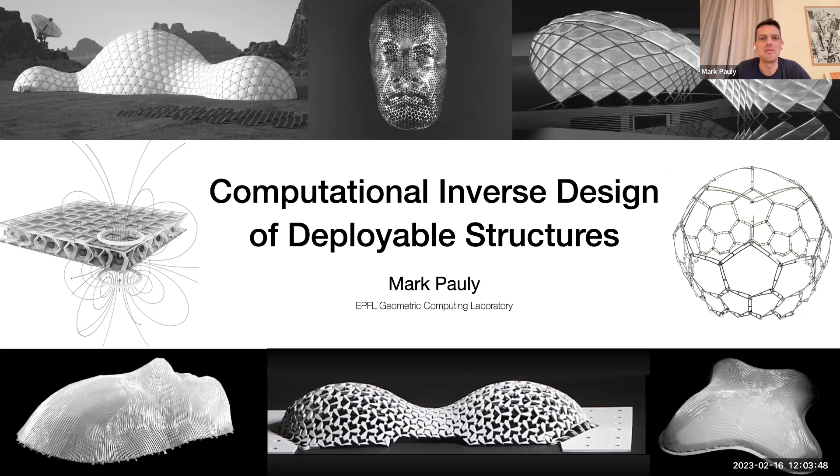Before getting started, I wanted to give you a brief overview of our playing fields. My background is in computer science, specifically computer graphics, and this is our core domain. But I'm very interested in fabrication, especially modern digital fabrication technology and what it enables us to do. We are interested in applications, specifically in the space of architecture, art, and design, also to keep us grounded and validate our computational work in the real world, so to speak.

And as Evgeny was saying, I'm personally very inspired by art and nature. Geometry is my thing, and I walk through the world and see beautiful geometry in nature, in artwork. A number of the projects that I'm going to show you today have been triggered by either an art piece or an observation in nature that made me curious, to understand whether this is something that we can understand and utilize in some way, and maybe do some computation with.

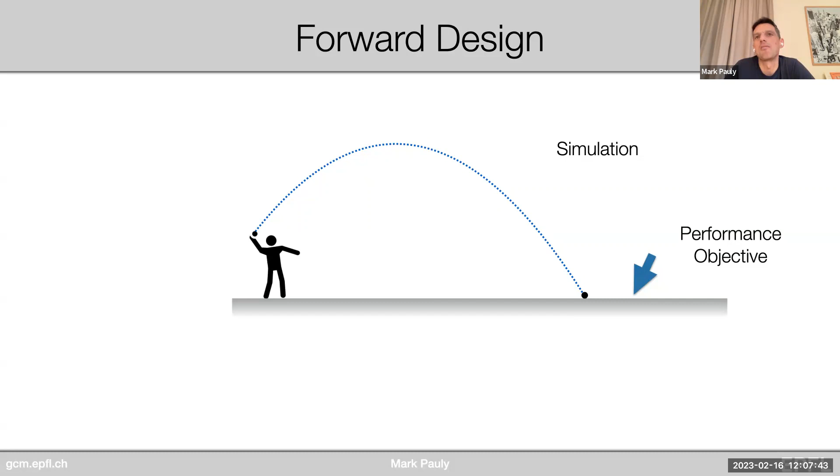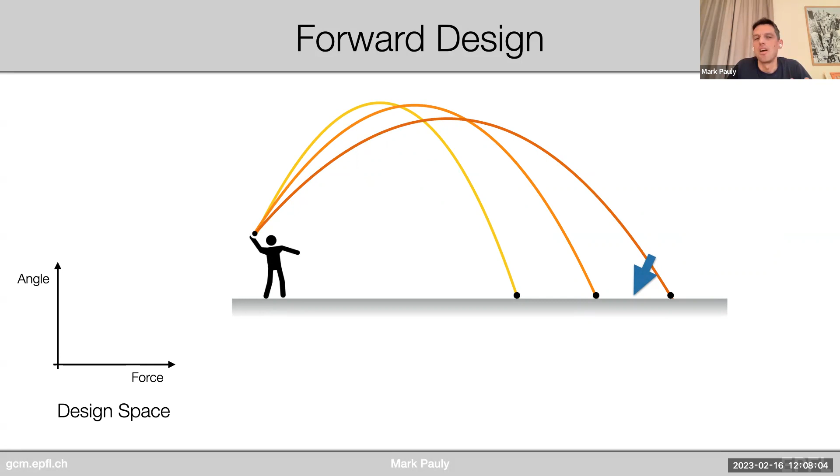So here we have a system where I can define a very precise goal, a sort of performance objective, if you will. I want to hit a certain point on this plane. And of course, I have parameters that I can manipulate, and this is what I call my design space. For example, I can add more force to my throw, and that will get me maybe closer or further away from my objective. I could also change the angle. So these, in this very simplified example, are the 2 parameters that I can vary to change my design.

And if I pick a specific point in this design space, in this very simple 2-dimensional space, then I can run a forward simulation, check whether I hit my target, and in that way evaluate my design. Now, this simulation can be quite complicated. This can involve complex PDEs, for example, things that are not so trivial to do. And in the end, I have to evaluate how good my design is. In this trivial example, I have a very simple objective: I just want to know how far I am from the target.

But in general, in design, you have many more and sometimes conflicting objectives. So in this performance space that you really care about, where you would evaluate your design, complexity can already be quite different. So you can design by just choosing parameters, running your simulation, and evaluating the design. That's what I would call forward design, where you directly manipulate the parameters at your disposal. But our goal will be to do inverse design.

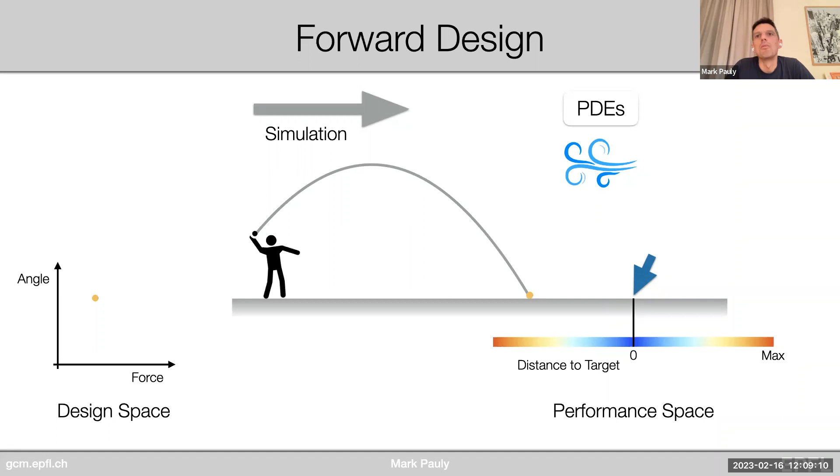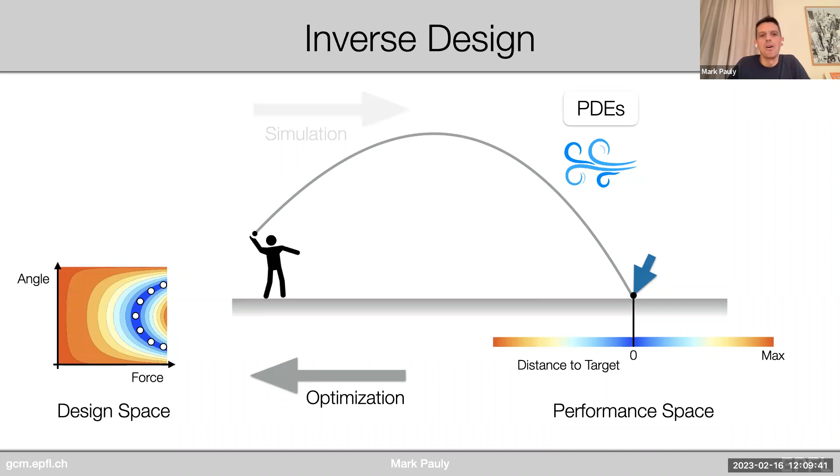And that means that I specify my design target, and I try to make this in a way that it can be quantified, or at least the aspects of my design that can be quantified. And now I want to invert this process and find the parameters in my design space that actually meet my objective, or if the objectives are conflicting, find some balance and trade-off. And this can give me various kinds of solutions that I can then explore or evaluate further. Now, this type of abstraction is actually quite helpful to think about the kinds of problems that I want to talk about.

So we have a design space. This is the space in which we can manipulate parameters that are accessible and exposed to us, a set of continuous or discrete variables that I can change. Then I have some sort of process, a forward simulation, and I'll show you this specifically in the context of our deployable structures, that allows me to evaluate this design and measure its performance. And performance could be shape, structural stability, visual aesthetics, many different things. And our goal is to say, as a designer, it's much nicer and more intuitive to specify your performance criteria, to say what you want from the design.

What is a good design? When is a design according to your needs? And then solve that inverse problem to find the design parameters. And these things are generally very hard, right?

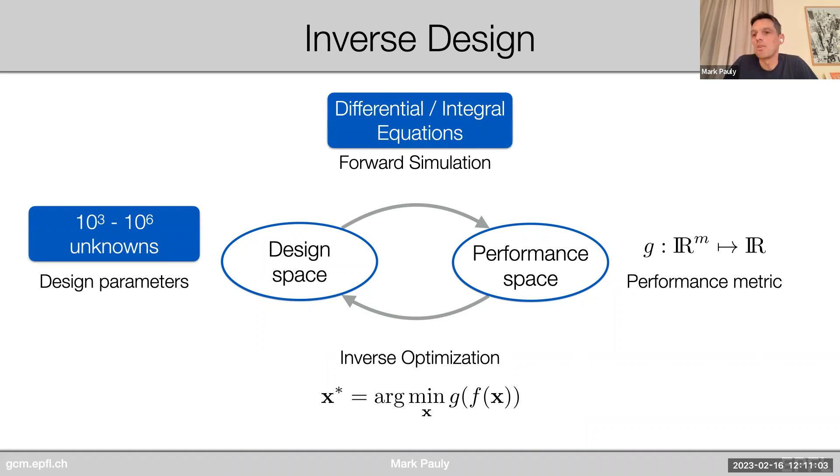Why is this difficult? In this toy example I showed you, I had 2 parameters. In general, we are often dealing with thousands or potentially millions of unknowns, and forward design in this space becomes completely infeasible. You cannot choose yourself 50,000 numbers to specify a design. It's just not practical.

The forward simulation in itself can be very complex. Typically, we have to solve differential or integral equations in high-dimensional spaces, so this in itself is already difficult. The performance metric can be complex to evaluate. Usually you have global dependencies, meaning that changes in a few of your design variables can lead to drastic changes in your outcome.

So this is in general intractable. If you specify most relevant, reasonable problems, you cannot really solve this in any meaningful way. So we have to really go in, and the two main ingredients in our work in some sense are to look at efficient ways to solve this. This is really, I would say, a numerical or computer science challenge.

But then the key thing that I would want to stress today is really that it's the geometry that matters, in the systems at least that we study. And I want to show you, or at least give you a glimpse of the kind of tools that we use to approach these difficult problems.

So specifically today, I want to talk about deployable structures. These are things that have fascinated me for a long time. So what are deployable structures? Basically things that can transform from one state to another, basically changing their shape.

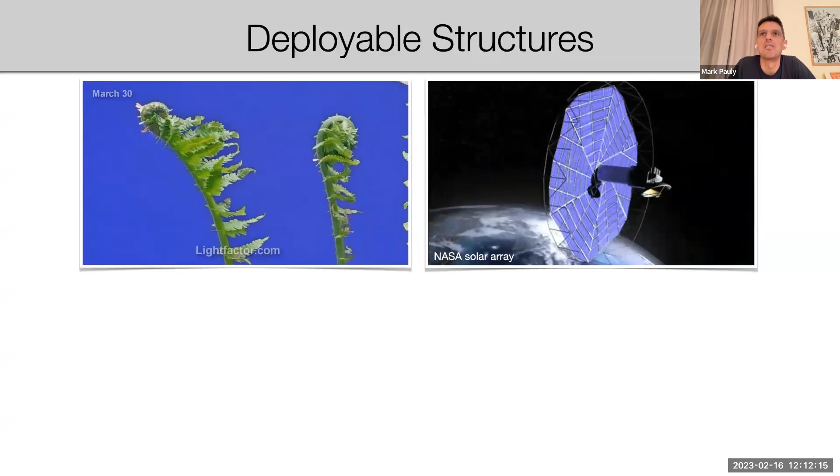And they appear in nature, they appear in industrial applications, they can appear in design and engineering, or even in architecture. So they can happen at many different scales with many different material systems. But the thing that is common to them is basically that there's a shape transformation happening, and that shape transformation has a function or meaning or use, right? So I want to walk you through a number of projects that we did in this space, starting off with a work on auxetics.

This is actually one of those examples that got triggered by design. I stumbled into a design store and I saw this kind of object, which is basically just a brass or copper plate with a specific pattern of incisions. And I was very intrigued.

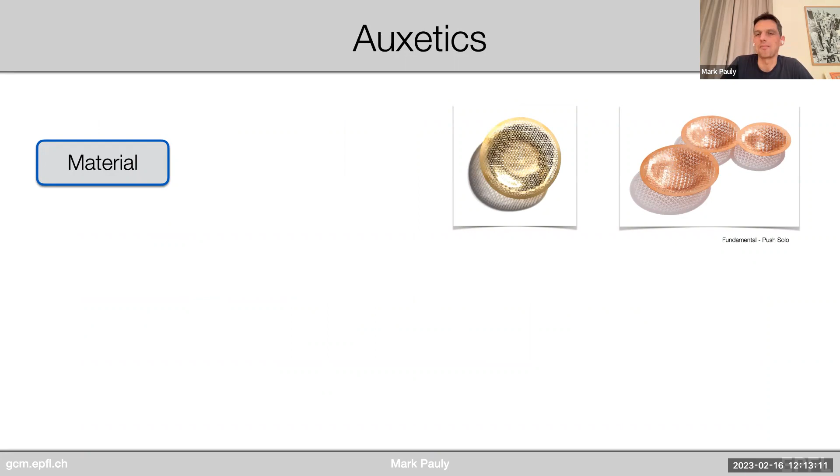Normally such a metal plate would just be bendable in one direction, sort of a developable surface. But if you add incisions, you can actually deform this material into double curved shapes. So we were curious about this, and we made our own copy.

Auxetic basically means that this is a material with negative Poisson's ratio. If you stretch it in one direction, it also expands in the transversal direction. And this actually allows this normally single curvature type of material to assume a double curved shape. So we can wrap this around a sphere, which we could not do with this plastic sheet if it was not having these incisions.

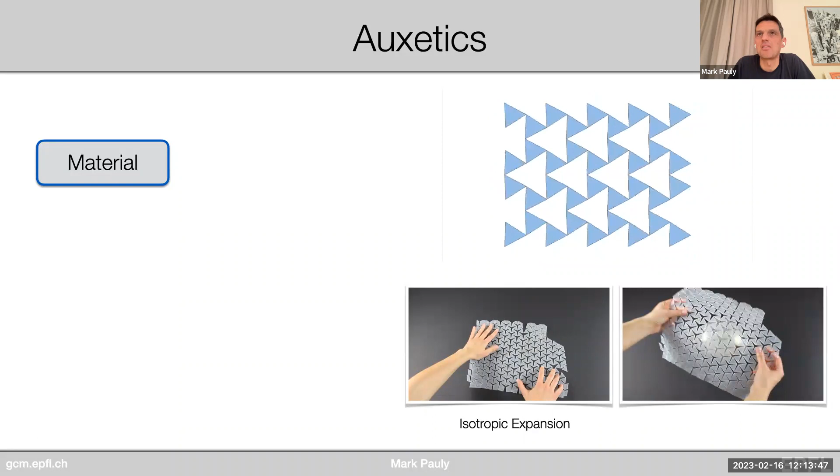So the first thing that we do is abstract this a little bit. Here, this type of specific auxetic material can be represented by a triangular linkage with a specific pattern that you see here. And you can see this isotropic expansion that is going on.

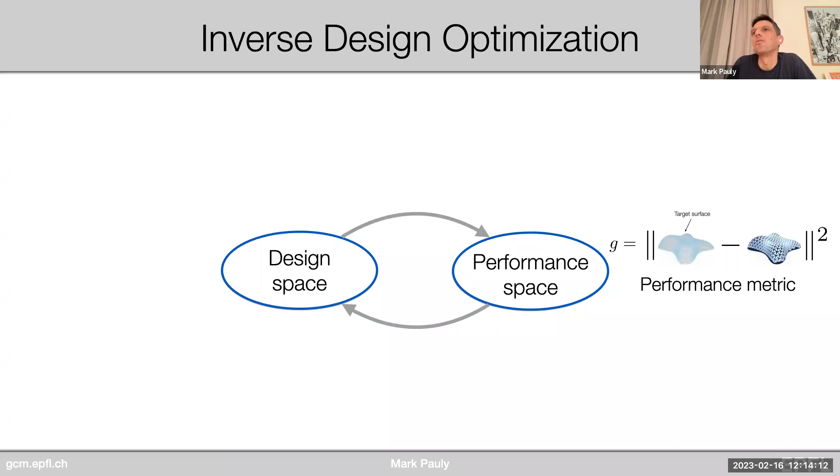And if I go back to our inverse design optimization, then our design target is really that we want to deform this object, or deploy this object, into a specific target shape. And our metric in this sense becomes: how close does our material, that is of course constrained, as we will see, achieve that specific target?

Our design space itself is the 2D sheet material, right? We want to cut out a piece of this material and figure out how it would deploy. So our forward simulation is that deployment, that deformation from the flat planar fabrication state to the 3D surface. So our input is actually the target surface, and our output is the 2D flat fabricated object.

And this is a theme that we will see throughout, in the sense that we have a number of systems where we deploy from one state that is easy to fabricate into a 3D state that would be very difficult to fabricate directly, but that has interesting functions or aesthetics.

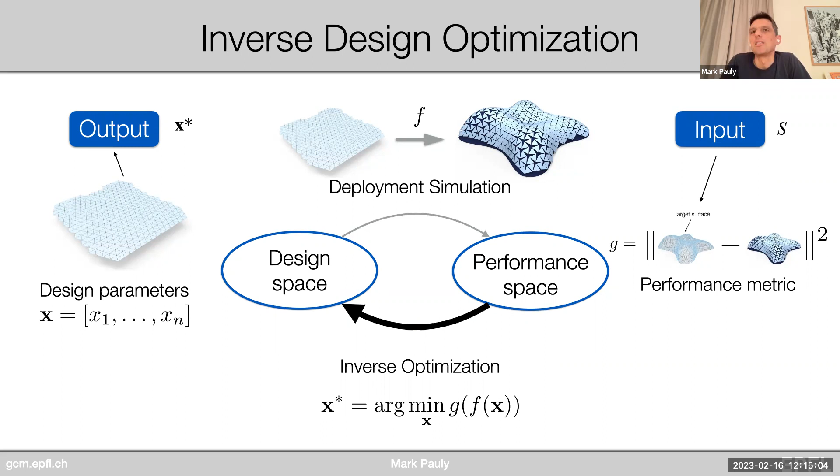So our goal is to solve this inverse problem. Here you see in this formulation that we're looking for the design parameters that minimize, in this case, this performance metric, the distance to the target surface. But you see it's sort of a nested loop, right? We have the forward simulation in the inner argument of that function.

So how do you solve a problem like this? This is a minimization problem. Typically what you do with functions like this is set the gradient to 0. That's a necessary condition. If you're at a minimum of this function, the gradient is 0.

So you can do gradient descent, a very basic method, which in our case would be: we have a target surface, let's say this scan of Max Planck, or a statue of Max Planck to be precise. And you have an initial guess of what you want to start with, maybe a sheet of material. Now you basically deform this sheet so that it matches the target.

And you do gradient descent on this. Very basic, very easy. Gradient descent, of course, starts somewhere, in this case with this initial guess, and moves down the energy landscape until it hits a local minimum.

The problem is, this doesn't work at all. If you run gradient descent on this kind of problem, the sheet tries to wrap around this object and it's just terrible. And this is not very surprising, because this kind of simulation is a very nonlinear, very non-convex function, and you cannot hope to start at a random point and get to a good local minimum.

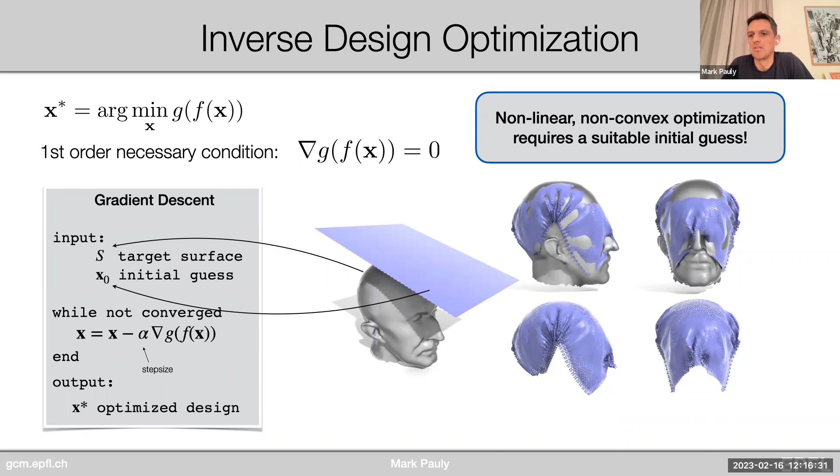So this is not a question of your numerical solver. It's really just fundamental to the problem. And what do we do? Well, geometry comes to the rescue. This is sort of a big theme we have in our research in general: we figure out ways to make this work by exploiting geometric insights we have about the problem.

I'm going to do a quick detour. I'm not completely sure what everybody's background is, but I guess everybody's familiar with the concept of curvature, at least in some sense. What does it mean for a surface to be curved?

Basically, we're looking at two types of curvature. Curvature in its first instance is defined for a curve, how much it deviates from a straight line. And if you generalize this idea to a surface, you end up with two types of curvatures that we often call the principal curvatures. Their product is the Gauss curvature.

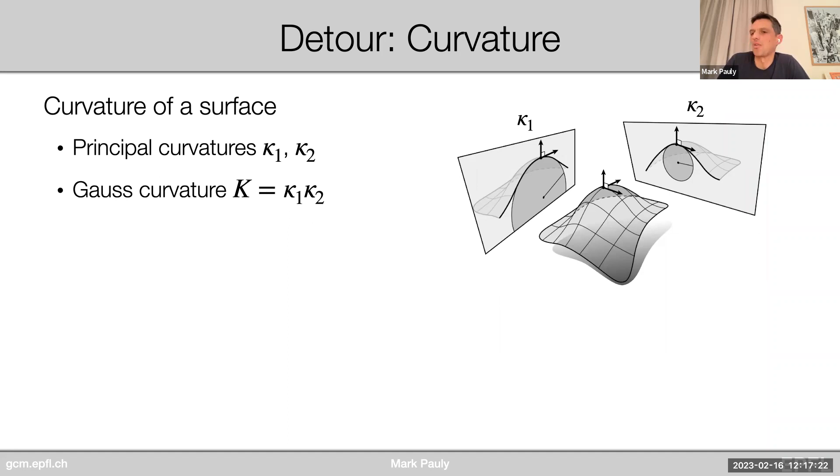When we talk about the curvature of a surface, typically we mean the Gauss curvature. There's other curvatures, like mean curvature, but here I will mostly talk about Gauss curvature, which is the product of the two. And that allows you to classify, for example, surfaces.

If I take a sheet of paper and bend it, the Gauss curvature is 0, and I can make so-called developable surfaces: cylinders, cones, things like that. Negatively curved surfaces are saddle points, and positively curved surfaces are sort of spherical or elliptical points.

Now Gauss showed something that he himself called the remarkable theorem. And if Gauss says it's remarkable, you can be sure it truly is remarkable. It's something that is not obvious at all and has very deep implications.

Basically what he figured out is that the Gauss curvature is an intrinsic quantity, meaning it's something you can determine by only measuring distances on the surface. So if you have a way to measure distances on the surface, you can actually figure out what the curvature is. And this is not at all intuitive, because curvature in principle is a second order quantity, and length is a first order quantity. So why is this possible?

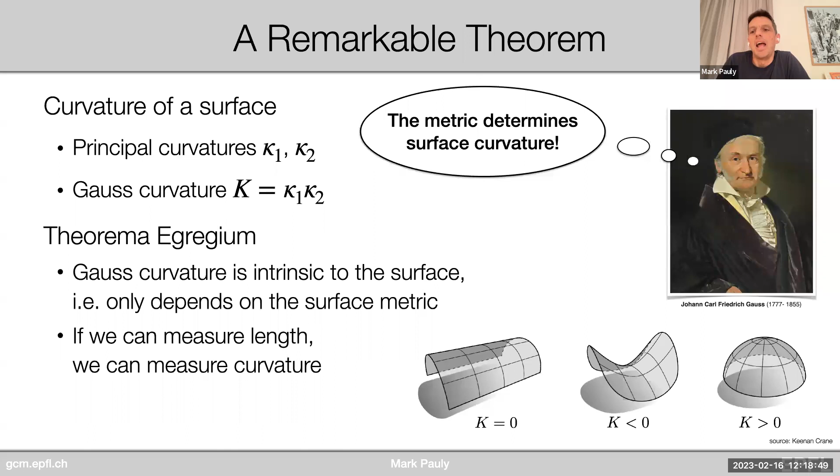I'm not going to go into the proof or more of the details, but I'm going to talk about the consequences of this. Basically, what this means is that the metric, meaning the ability to measure length on the surface, determines the curvature. And this is a principle we can now turn around: we can say, if we can change length, we can change surface curvature.

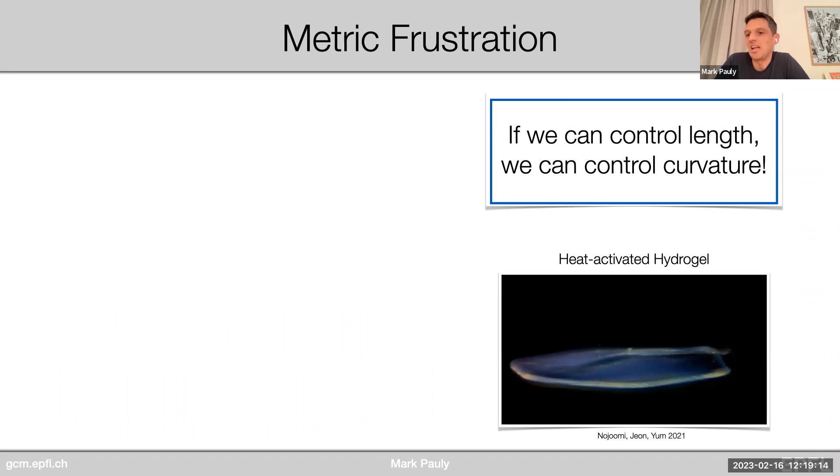So this is actually a principle that has been used a lot, in many different instances. Here's an example: a heat-activated hydrogel. As you heat this up, this surface will expand in the plane at different rates. So we're changing length across the surface. And if you do that, the surface buckles out of plane.

In order to accommodate that change in length, it has to assume curvature. There are many other examples like this, so we can control the shape of a flat piece by changing its length. This also happens in nature a lot. If leaves grow at different rates in different parts, the only way to accommodate that inconsistency is to buckle into a 3D shape. And this is exactly the principle we're going to exploit for our auxetics.

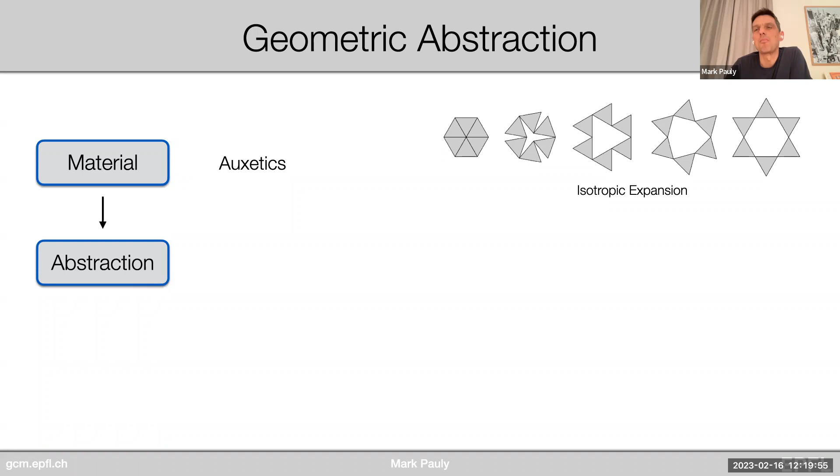We've seen from this regular linkage pattern that we have isotropic expansion, and this is something we can abstract into a so-called conformal map. It's a very deep mathematical theme, but relatively easy to explain. It says that if the material expands isotropically, at the same rate in all directions, then locally the surface scales uniformly. So we preserve angles.

If you look at this example, the regular grid in the plane gets transformed. The squares remain squares, but they change in size. You can of course also do this from a 2D surface onto a 3D shape, so this is a mapping from the plane into 3D that preserves angles but changes distances. People in computer graphics have developed ways to compute these conformal maps for arbitrary surfaces, so given some 3D shape, we have a way to compute this type of flattening in the plane.

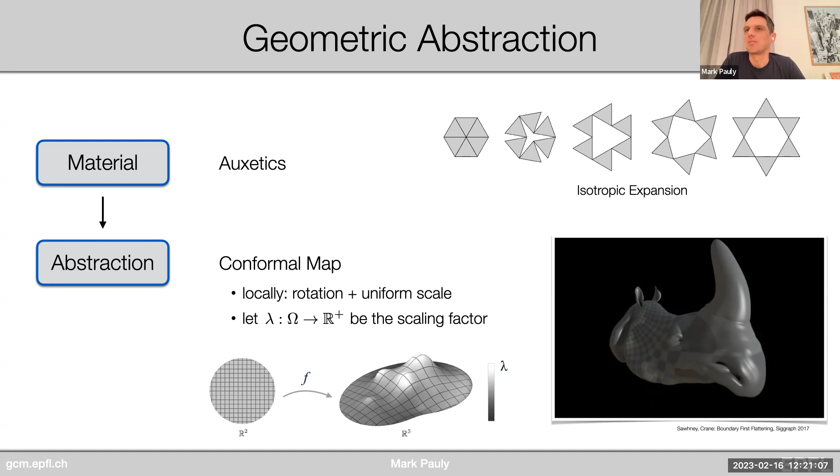Now there's something very interesting happening. A conformal map is a special kind of mapping from 2D to 3D, one that allows us to very explicitly write down the curvature as a function of that local length scale. This is a famous formula in differential geometry. The specifics aren't so important, but it says that the curvature is related to the change in length, this uniform scaling factor. The Laplace operator in there says it's actually the variation of scaling that matters.

So this allows us to control curvature, and consequently the shape of our structure, by varying the local expansion in our map. If I take a regular triangulation like before, or take this auxetic and open it uniformly, there's actually no curvature, because the scale factor is the same everywhere. And if I take the Laplacian of a constant, it's going to be zero, so Gaussian curvature is zero. So we can only achieve curvature if we let the opening vary across the surface.

Here's an example: if we want to map this onto a sphere, then these openings are not uniform. They're not the same everywhere, but they vary, and this variation is precisely encoded in that shape.

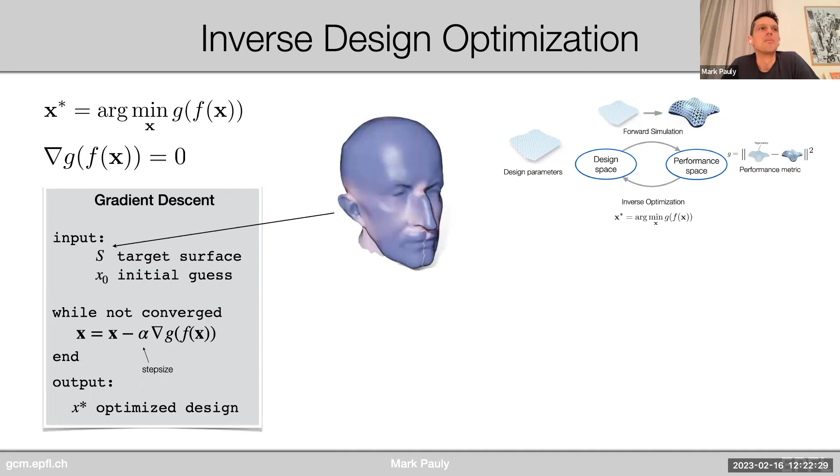So what that means for us is that if we want to do an inverse design pipeline, going back to our gradient descent method, we're not starting with some random surface, but we're starting with a conformal map of our target surface. We apply this conformal mapping paradigm to get an initial guess for our optimization. In practice we do something more advanced, but if we could do gradient descent, we now actually get a solution that works, because we understand that to get to this shape, we need something close to a conformal map. So the conformal map gives us the initialization we need.

If you compare this with the naive solution, where you start with no information or a random guess, the result is drastically different. Now we have a complete pipeline: take an input shape, compute its conformal map, run our optimization, cut this out of a piece of copper, and deform it into the target shape. It will fit—you know exactly how much you need to open each of those hexagons to get to the shape. So you get the complete solution.

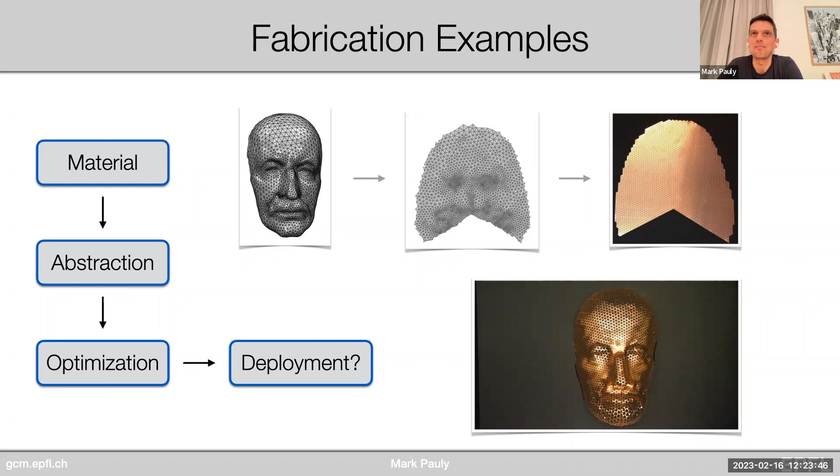Now, I told you about deployable structures. How do we deploy this? Actually, this isn't deployed at all—it's just manually deformed by hand onto a mold surface. To make this actually deployable, we have to take it a step further. So what we're doing here is really just creating a fixed type of material.

All of these incisions are the same. The material doesn't know what shape it wants to go into. We have to give it that information by, for example, using a mold surface. So we need this external surface to actually tell the surface what it wants to deform into. And that makes deployment complicated, because you almost have to first make the surface to be able to deploy it.

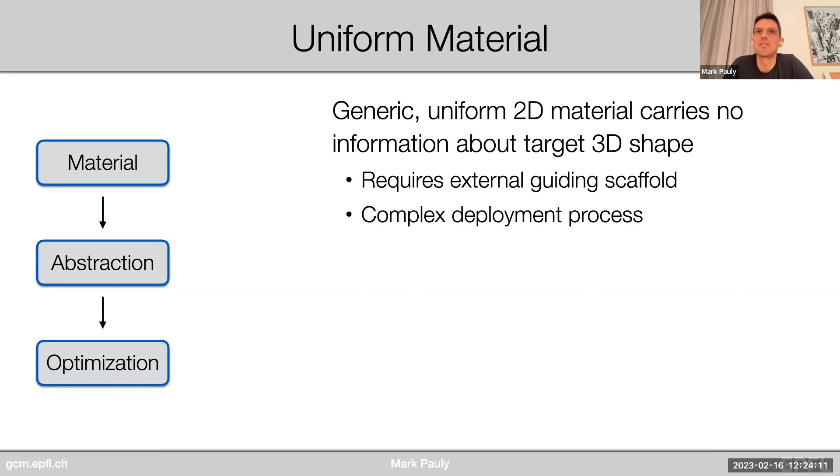But what we can do, and it requires actually a very little change, is to encode the target surface, so the surface that our structure is supposed to deform into, into that 2D material. That's what we call sort of programmed material. And it's a simple trick.

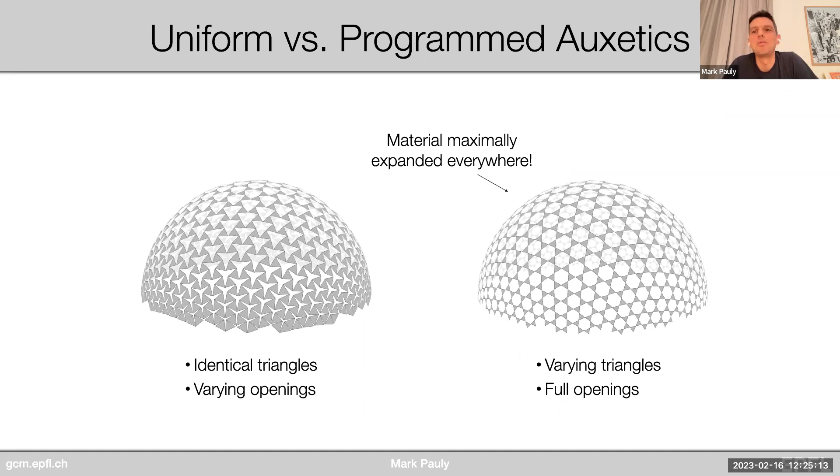We can achieve the same effect by actually changing the size of the triangles, but keeping the openings fully expanded. Okay, so this actually gives us sort of the same structure. It looks a bit different, but the underlying mechanism is more or less the same. What that means, though, is now that our material in its 2D state is not uniform anymore, right? We now have to create this specific material for this specific shape.

But what it allows us to do is, so here you see this sort of variation. Some of these openings are already partially open, where we have less expansion, and where we have more expansion, we have bigger triangles that are more closed up. But now we have actually the target shape encoded. If we come up with a way to stretch the surface out as much as it can, then it will automatically go into the shape that we've programmed into it.

And we explored sort of two types of actuation. One is inflation, and the other one is just using gravity. And I'll show you how that looks like.

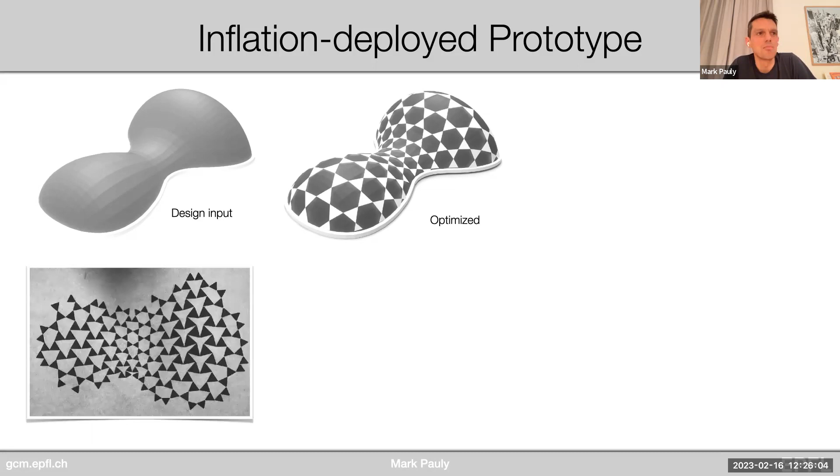So here we have a target input surface, and the optimized result is shown on the right. We can now flatten this surface, of course. We cut it out of a piece of cardboard in this case. We build a little frame so we can inflate this, and we add a balloon, right? So this balloon you just inflate, it's a silicon rubber thing. It would go to whatever shape it wants to go, certainly not to the shape that we specified as input.

But if we now add this material on top, then this balloon will now inflate exactly to the shape that we designed, because this material will stop moving once it's fully expanded. It cannot move anymore, right? This is the principle that we exploited here. So we've programmed this shape into that 2D material.

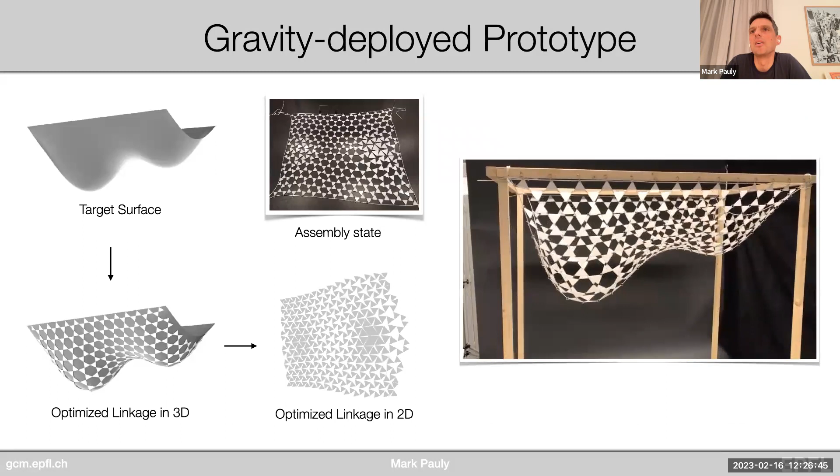And for some more restricted types of surfaces, you can even do this by just letting a structure hang, right? This is now a doubly curved structure with positive and negative curvature that just deploys automatically by gravity, because these tiles want to expand as much as they can.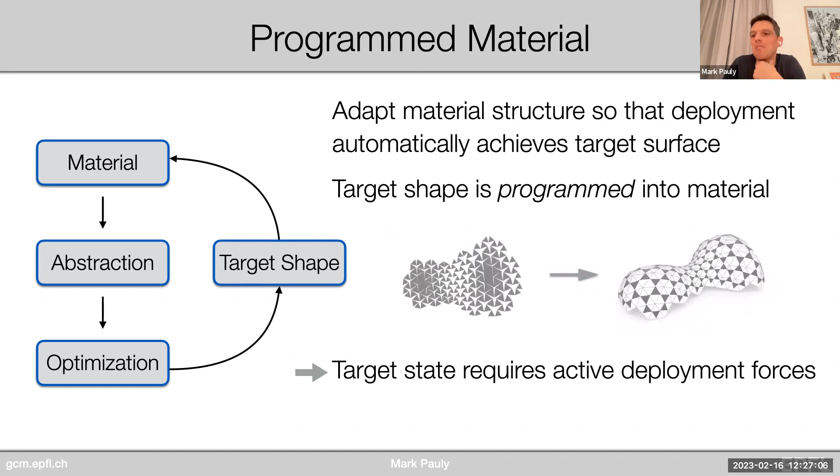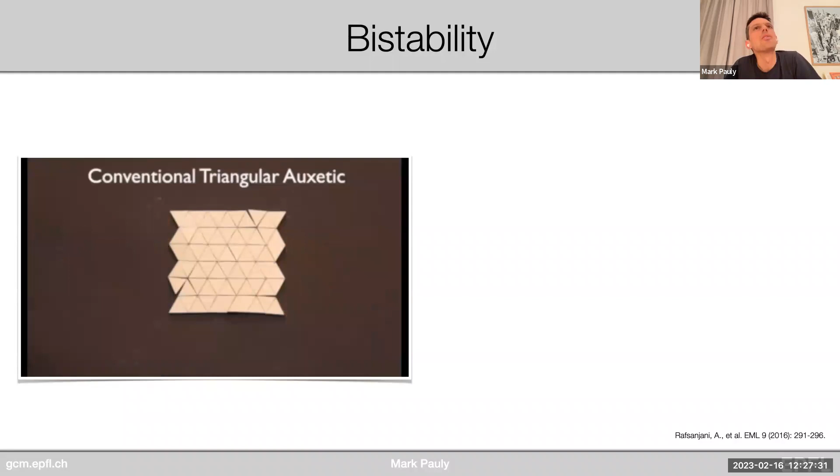So here we have a programmed material, that's nice, but it requires active deployment. Okay, gravity is a cheap deployment, it's there all the time, unless you go to space. But inflation is something that if I turn off the pump, then this surface will go back to its original state. Why is that? Because the type of linkages that we use are sort of elastic, right? I can pull them apart, but then if I take off the force, they will just go back to where they started.

And now we also got aware of this type of bistable auxetic pattern, which is interesting in that it has a second state when it's fully opened that is also stable. So bistability here means that there's an energy barrier between the initial state that has zero energy and this deployed state, which has a higher energy, but it will still be stable because it's in a local minimum of the energy. So this is very simple, and we can extend this immediately to our framework.

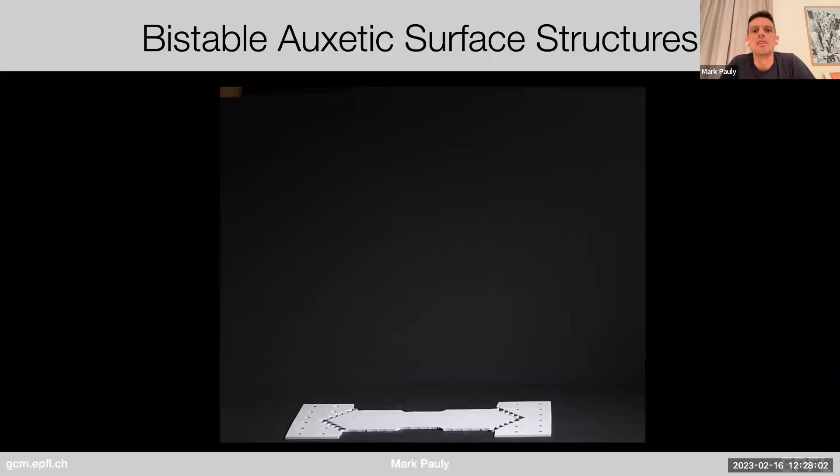So here is an example of a bistable auxetic, which is made out of silicone, a very flexible material, and just by injecting some energy, by shaking it, it deploys, but it now stays in that shape, because this is now again a state of local minimum energy.

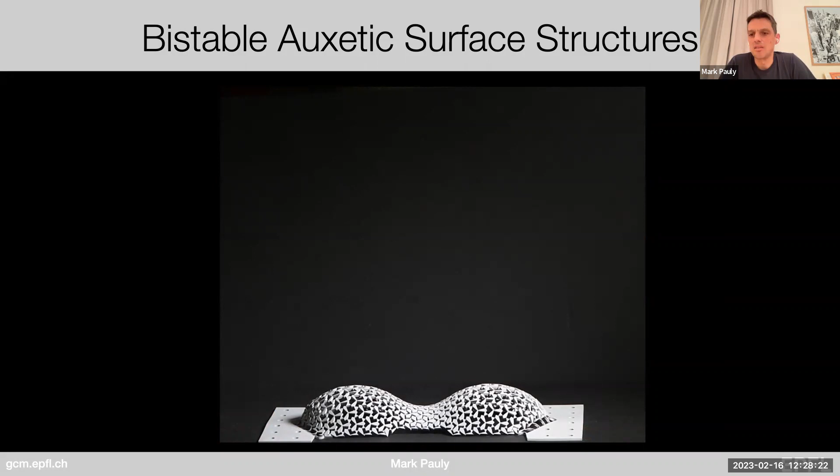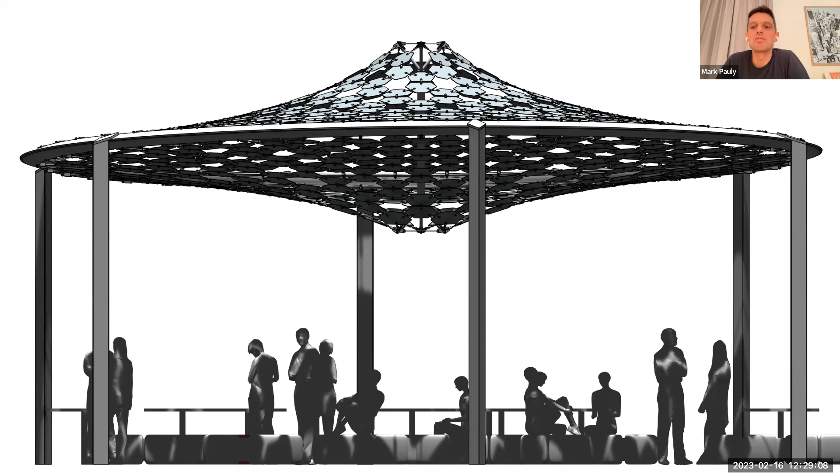Okay, wow, we're already like half an hour in. This is going to be interesting. So let me come to the second topic.

Another type of deployable structure: inflatables. We used inflation already for deploying auxetics, but here it's very different. We take two sheets of material and we fuse it along these orange curves, and this is what you get in an air mattress, basically. So you blow this up, it expands in the vertical direction, but it contracts in the other direction.

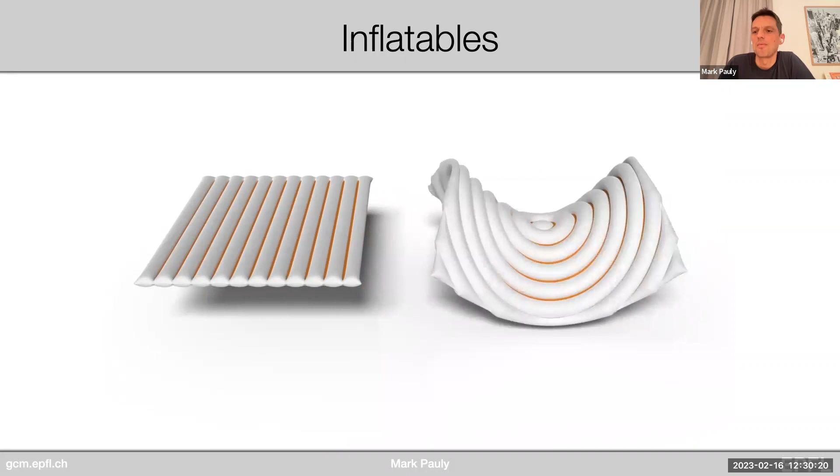Now an interesting question is, what if these lines are not straight? For example, what do I get if I put circles here and inflate this? Will this stay planar? Well, at first yes, but then I get a saddle shape. Why is that happening? So I can make these curved shapes—well, let's understand what is going on here.

So again, we come up with an abstraction that explains what's happening. Basically these tubes go from a flat state into something circular. If I put pressure into this membrane, it wants to maximize its volume, which wants to make those circular. So what's happening is, because this material is inextensible, it expands vertically but contracts horizontally—it contracts in plane, but only in one direction. This is not an auxetic; an auxetic would also contract in the other direction. This surface only contracts in one direction and stays the same in the other.

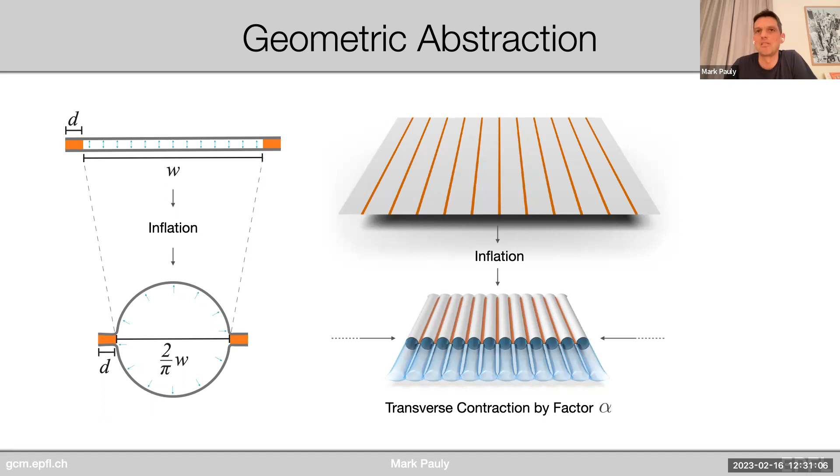But effectively what that does is it assigns a new metric to this surface. So if you look at these circles, for example, the length of the circle stays the same, but the distance between the circles becomes shorter. And for this to work, the structure has to buckle out of plane. So again, inflation actually assigns a new metric to this flat sheet. And Gauss tells us, if we change the metric, we change the curvature. This is precisely what's happening here.

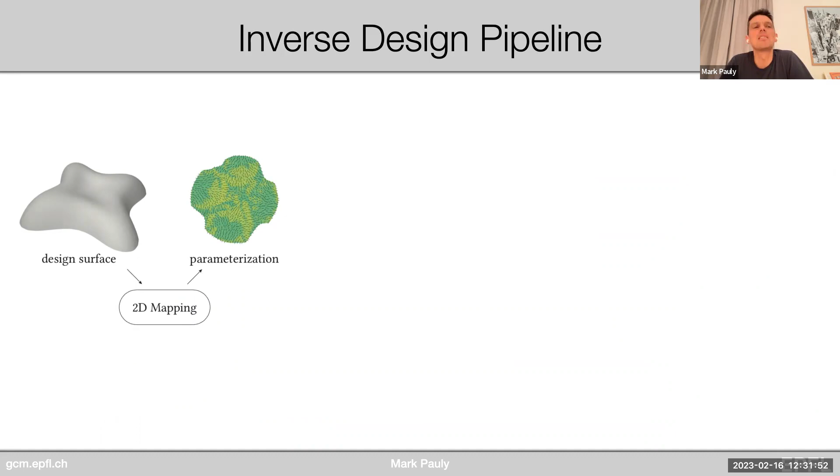So again, we can take our inverse design pipeline: we take a design surface that we care about, we first do a flattening into the plane—this is a specific algorithm we developed that I'm not going to talk about too much—but basically it flattens the surface by respecting this anisotropic contraction that these inflatable mechanisms provide. And then we can draw out these tubes according to the direction of this mapping, and then we optimize.

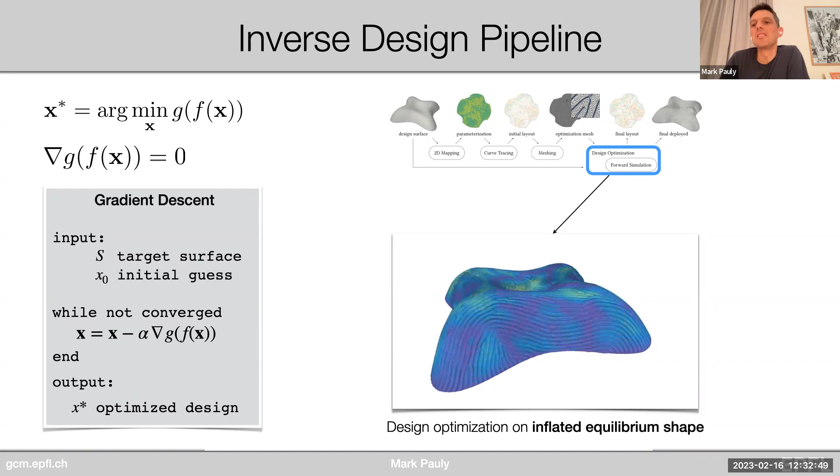So optimization here basically means two things. Again, if we look at our very basic gradient-based setup, we get our target surface as input, and we get this initial guess from our 2D parameterizing. This is again absolutely crucial—if you start with a random initial guess, no hope whatsoever. Now in our inner loop, we simulate the inflation process—we run a simulation that tells us how this object deforms on inflation. And then in the outer loop, we change the initial parameters, meaning our 2D design, so that this equilibrium state more closely approximates our target. So this is a fairly involved optimization.

In fact, we're not doing gradient descent at all on this. I don't have time to go into the details, but for those of you who might be familiar with more advanced numerical methods, I'll just drop a few keywords and I'd be happy to discuss things in more detail. And there's also references at the end. But basically, we cannot work with first order methods here. We build a Newton method, or more specifically a Newton conjugate gradient method. We really have to go to higher order information and build this solver very carefully over many months. And there's a lengthy document that describes this in detail. So if you're interested, I can point you to this.

But it is an example of where black box solvers will not work. This is something we've discovered over and over again. Of course, there are powerful numerical tools out there, but if you just plug in your objective function and hope for the best, it will not work. It will not even tell you why it doesn't work. It will just stop and do nothing, right?

So the geometric models, the abstractions, are fundamental, but then also sometimes, not always, digging deeper into the numerics is necessary. Fortunately, now we have more powerful tools. There's a lot of very useful things for automatic differentiation and libraries that help you build these solvers much faster than in the past. But sometimes you have to dig to lower levels.

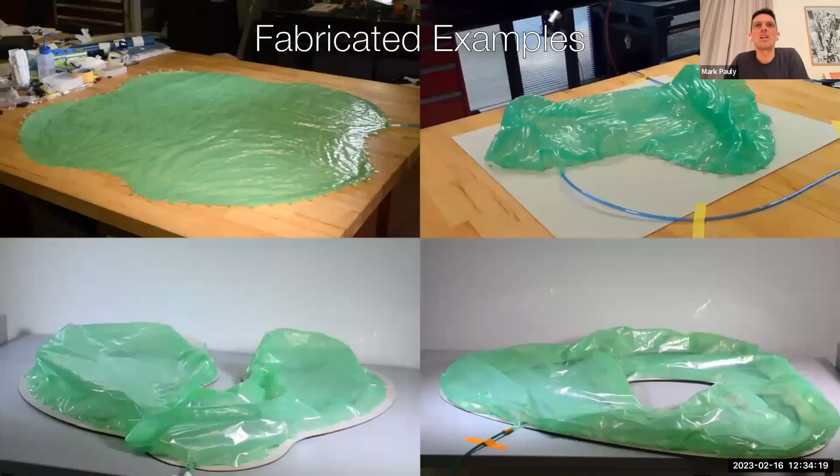So what does that look like? Here are some examples. So we have these two flat sheets that we fuse together with a laser, and then we can inflate them and they go to the shapes that we want them to go to, which is great. And we validated this with scans and saw that the predictions of our simulations are actually quite good. We also did some structural tests and load testing, but right now we're actually working on improving the structural aspects of these surfaces.

They are surprisingly stiff, right? If you take an air mattress, it's very floppy when it's uninflated, but once you pump it up and get it to high pressure, it becomes extremely stiff. So this is something we're now optimizing for precisely, and then the range of applications will become even larger.

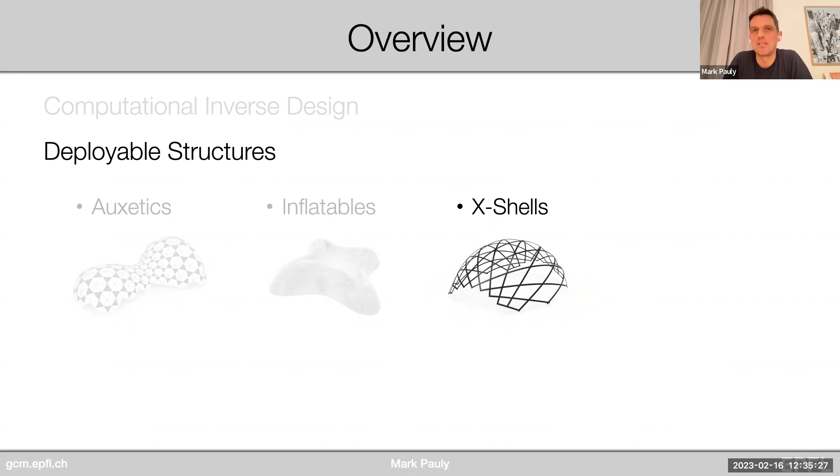So moving on to a different system, but one that also shares some similarities. So far I showed you these auxetics, which have this kind of conformal map, isotropic expansion. We saw the inflatables, which actually contract in a specific way. Now we're looking at linkage or mechanism-based structures. If you take a regular grid of rigid beams, you can build these scissor grids that can deploy, that can expand in the plane. Basically what you have here is rigid beams connected by rotational joints, and they allow you to deform the structure in this way.

Now, what happens if you move away from a regular grid and you have beams that can actually deform, that are elastic? What happens if I try to open this type of structure? Well, something very interesting happens. The linkage is incompatible. If it was rigid, it would just block. But if it is flexible, it can now deform and buckle out of plane into 3D shapes.

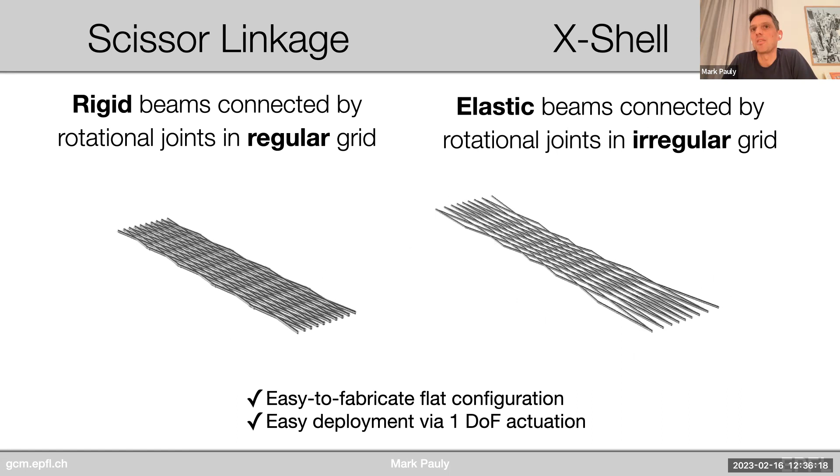So what's nice about this is, again, we have a structure that is planar when we assemble it, so it's very easy to build. And it deploys with a more or less one degree of freedom actuation. We just pull it open. So this requires us to understand elastic beams.

So, we have a new visitor, nice.

So we're studying how elastic beams deform, and we use a model that has been developed in computer graphics, which is quite powerful and has found its way into a lot of mechanical engineering applications as well. We abstract a beam by a center line and then study its stretching, bending, and twisting energies. And there are specific formulations of these, all in a representation of a piecewise linear polyline.

We can connect these into networks of beams, and now we can simulate their deployment by actuating them with torque at the joints. So if I do this, here's another example. This system settles into some state of minimum elastic energy as I apply these torques at the joints. And this is exactly what we're trying to do.

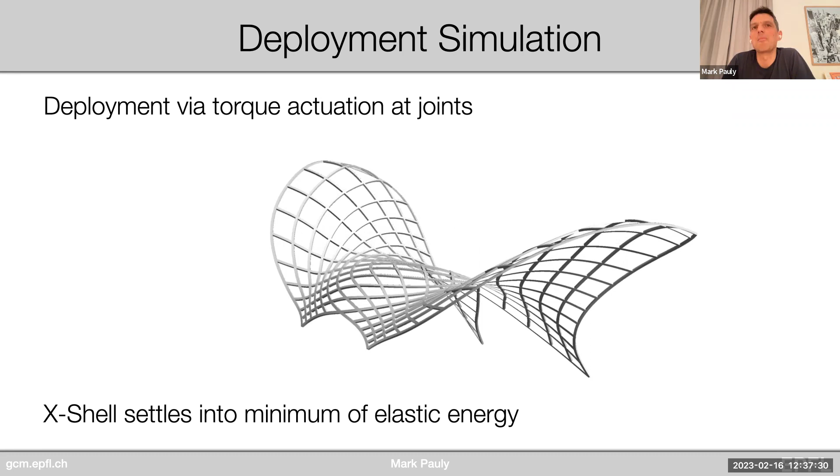Design in this space, defining target shapes and finding layouts that would deploy into a target shape while minimizing their elastic energy. The specific design optimization is similar in flavor. We have, again, a forward simulation in the inner loop, and then an outer step. We have to differentiate through this complex optimization.

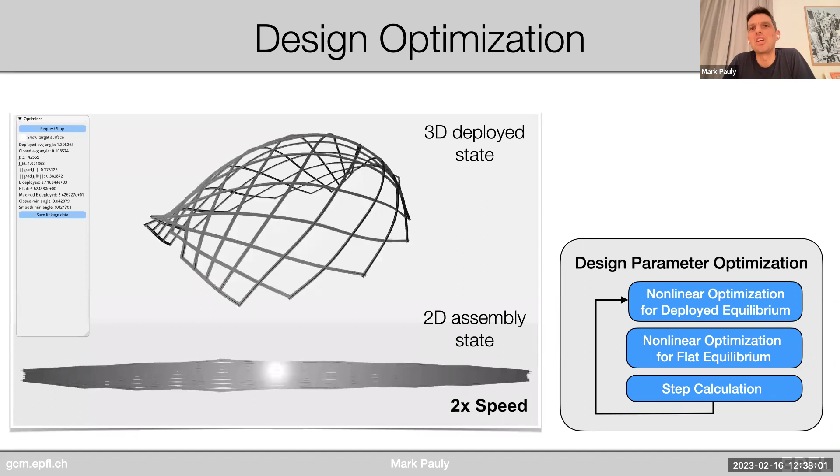And what it does is actually, it looks very unimpressive. So what you see here is the optimization in action. You see very few things are actually moving, but that's exactly what we care about, because we don't want to change the design that we're given. We want to just optimize its structural properties. But the outcome is quite drastic.

So we really reduce energy and stress in the beams drastically, which actually is the only way to make this work, because these beams, they're elastic, but they're not infinitely strong. So if you don't optimize in this way, there's not much hope that you can deploy the structure. But if you do, you can actually pull these things apart into their target shapes that you designed.

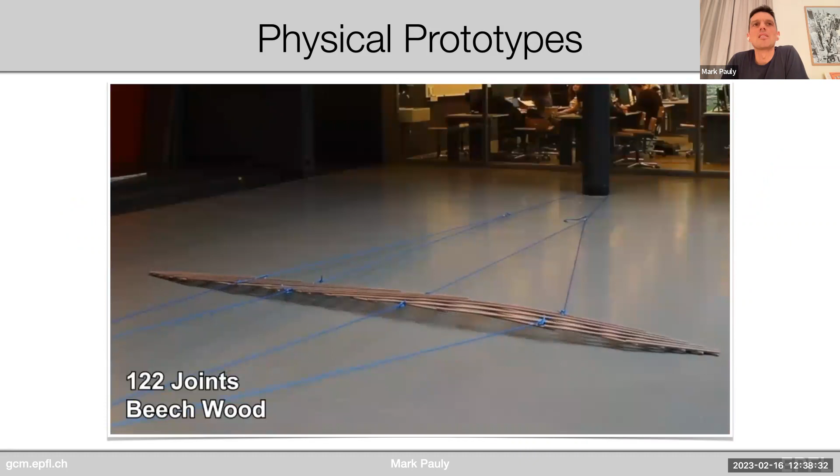You can play with different types of curvature. We built a few of those, and you can deploy them automatically. You don't have to really, just pull them open. I mean, these ropes here are more or less randomly placed. The structure goes into the shape that you designed it for. And again, the simulation and the physical experiments match quite well.

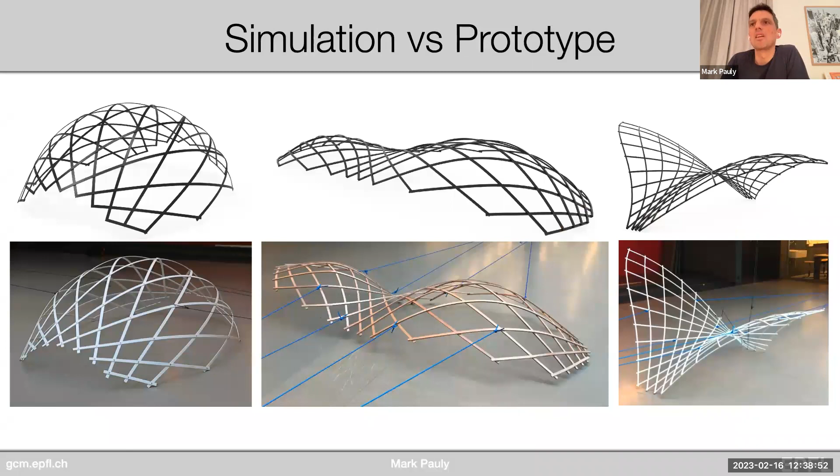We also scaled this up a little bit and participated in a pavilion competition that we actually got the prize for. Here's a deployable grid shell structure that goes from a flat state that you see on the left, and as you pull it open, goes into this spherical state. Here we installed this at EPFL.

So, yeah, how are we doing on time?

Okay, let me still do a quick aside, also because I know Evgeny is interested in this. We did some work on curved weaving, which is building on the same type of functionality, where we basically extended traditional weaving that works with straight ribbons into curved ribbons. And again, we needed a good physical simulation because we are interested in the elastic behavior of these structures and make sure that they stay in a certain shape that we designed for.

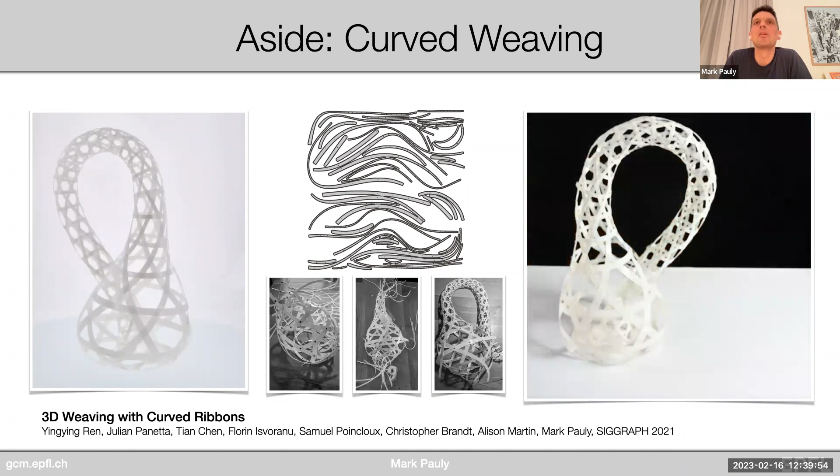And I'm not going to go into too much detail here because today's talk is about deployable structures, and these are not deployable, but they allow us to design a lot of interesting shapes. And we actually decided that it could be interesting to combine these deployable gridshells with these curved weaving structures. So we built a structure out of bamboo.

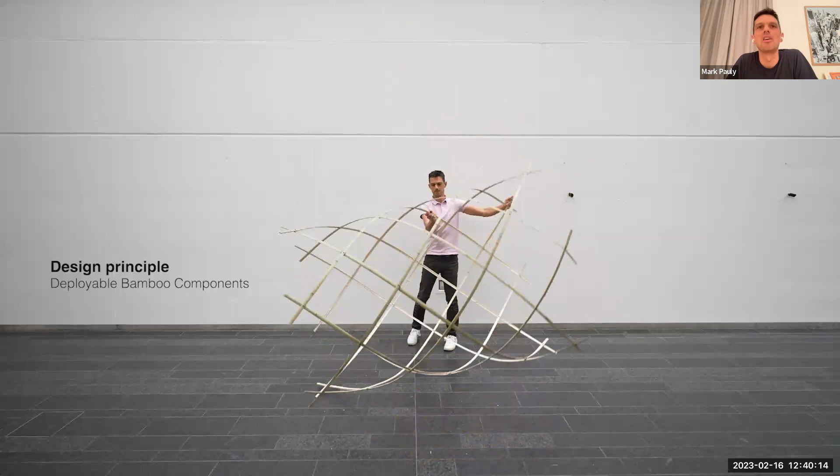Here you see a single cylinder that is actually very flexible and very deployable. It has a regular grid structure, and you can deploy it from this thin to very wide section. And then we decided, what can we do to build something more large scale to combine this with weaving? So these cylinders are very weak and very flexible, but if we weave them together, so if we make connections where these deployable structures come together and are interwoven, we can actually build something that is structurally very strong.

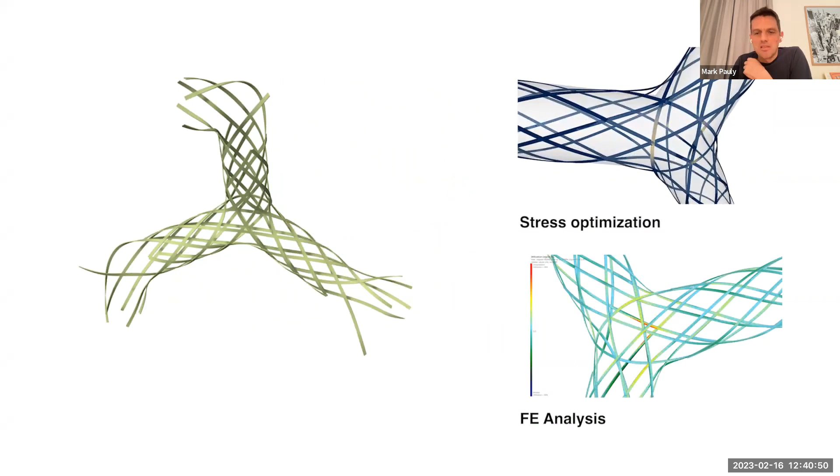So here we created this type of threefold node, and we optimized it to reduce stress inside the node. And then we decided to build something bigger out of this. So in fact, we created 36 of those cylinders that you see here aligned on the ground. And then we assembled that by deploying them individually and weaving them together.

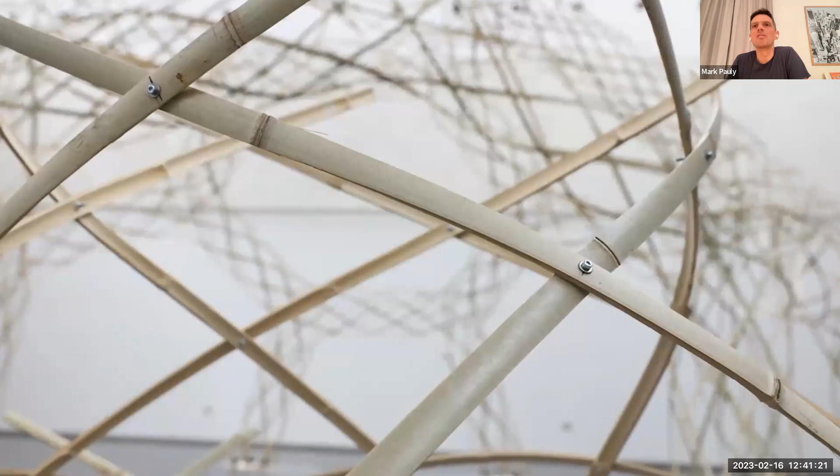So at the nodes where 3 cylinders come together, you have to build the connections with these bamboo strips, and then ended up building a fairly large scale structure that, even though each of the cylinders is very weak in their compound state, becomes a very stiff and strong structure. So this is all made with raw, untreated bamboo that we got from the garden of our collaborator.

The structure is strong, but it's lightweight, so you can actually lift it up, even though it's 10 meters in diameter, 4.50 meters high, but people can lift it up with one hand. So it was quite a fascinating exercise to see this combination of weaving and the deployable cylinders that we created.

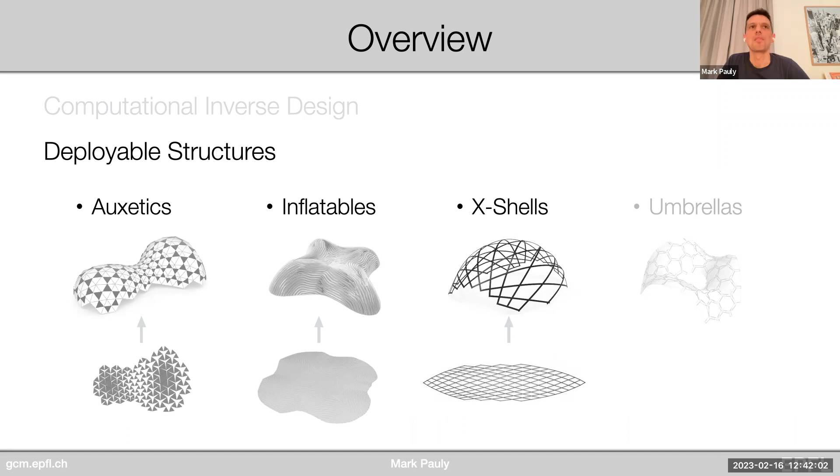Okay, almost through, last one. So this is one of the more recent projects that actually combines a number of the things that we've seen so far. One thing that is common in all of these three examples I showed you so far is we always have a planar state, and we deploy by transferring material within the surface. So we're basically changing length within the surface, and as a consequence, the structure buckles out of plane.

But this is limited, right? The auxetics can only stretch so much. The inflatables can only contract so much. And these linkage-based mechanisms also have limits in how much they can expand or contract. So that limits the space of shapes that you can assume.

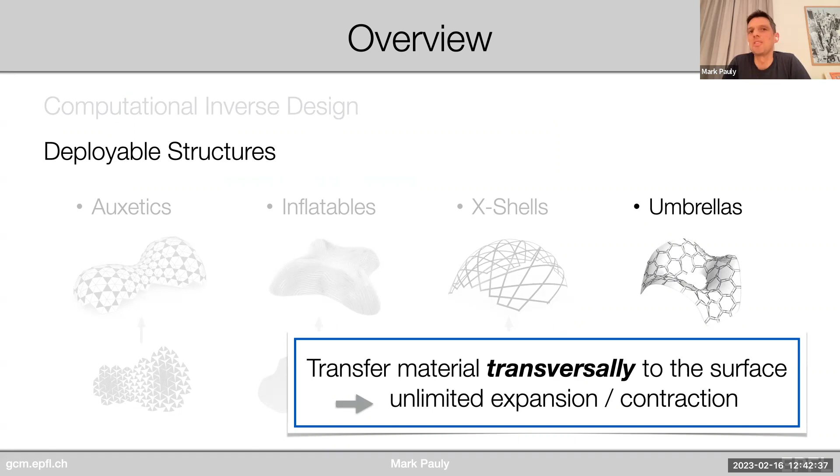The idea of the last project I want to show you is that we can also transfer material transversely. So from the third dimension into the plane. And this gives us actually, in principle, unlimited expansion and contraction. And with that, a much richer space of shapes. How does this work? This literally was inspired by umbrellas. So that's why we call it umbrella meshes.

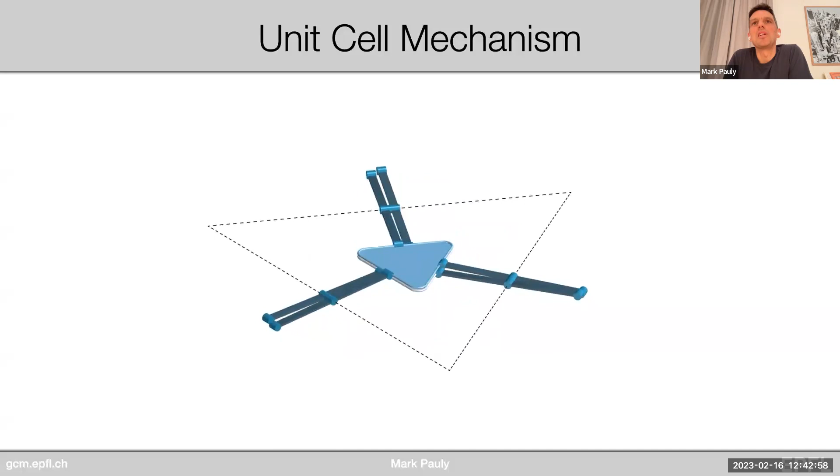So here's an abstracted mechanism of an umbrella deploying, right? So again, you have these sort of scissor linkages, but now as I push these two plates together, the structure is expanding sideways. And of course, we can measure this expansion. It's just a simple formula that tells you how much will this area of this dotted triangle increase as I push this umbrella open.

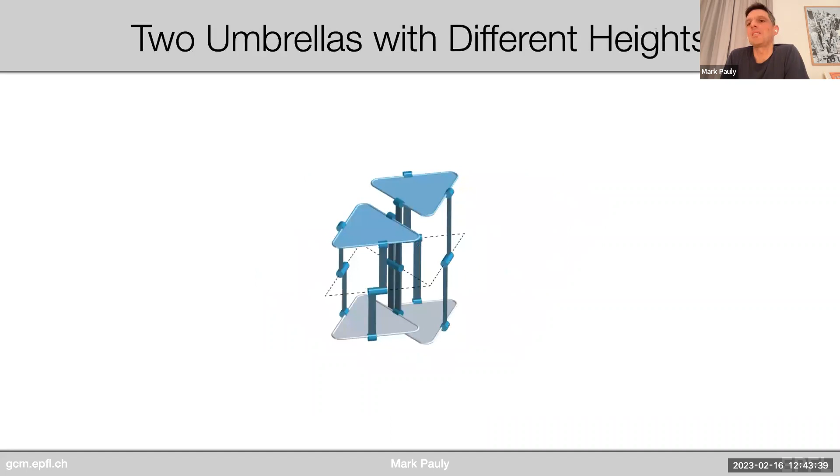If I now take a tessellation of these umbrellas and put them together, then what I end up with is a uniformly expanding structure in the plane. This is very similar to the auxetics, right? In fact, it's the same type of expansion, and we can use the same type of mechanism. But what happens if I now change the height of the umbrella? So if I take two umbrellas with different heights, then they will actually expand at different rates into different areas.

Okay, so here this is all nice and compatible, but if I put them together and I let them expand, they will not be compatible anymore. At some point, some parts expand more than the others, and of course we know our friend Gauss has something to say about this, right? If there's changes in length, then we get curvature. So here we have flexible beams. With rigid beams, the structure would just lock, right? Similar to the X-shells, where we have these elastic beams, the structure settles into a minimum of the elastic energy.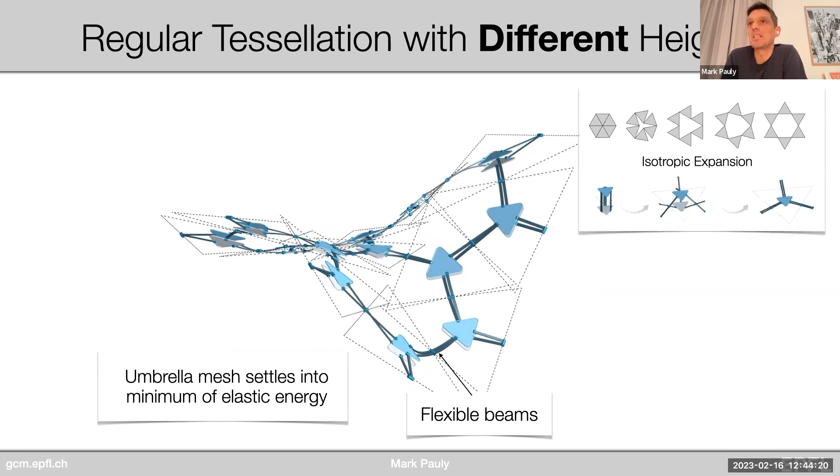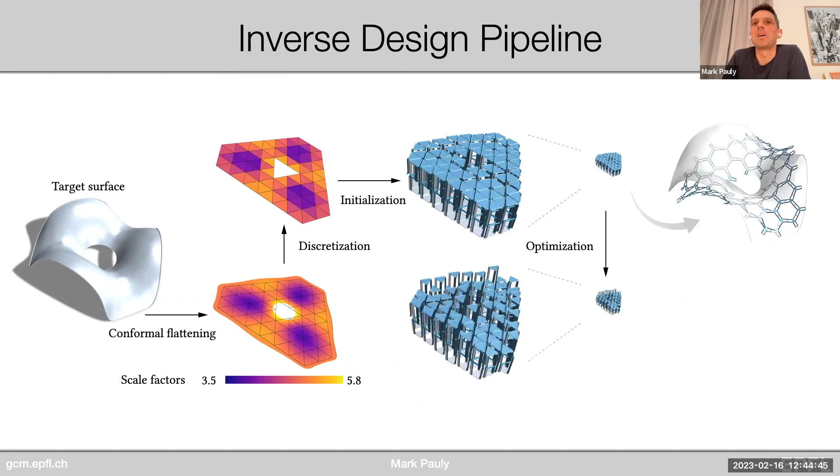But the expansion here is actually very similar to the auxetics. It's isotropic, which means we can leverage our conformal map formalism. And this is just our friend Gauss, right? So the pipeline is actually very basic, similar to what we've seen before. We take our target surface, we compute a conformal map that tells us how high these umbrellas should roughly be. It's almost there, not quite. So we run our optimization and approximate the target shape more or less perfectly.

And this is what the simulation looks like. So we have our very compact umbrella mesh. As we expand it, these beams rotate and deform, and the structure approximates the given target surface. If we build this, you see a sort of prototype that we made, and it very closely matches the shape that we assume. What's very nice about these structures is that they're very compact in their undeployed state.

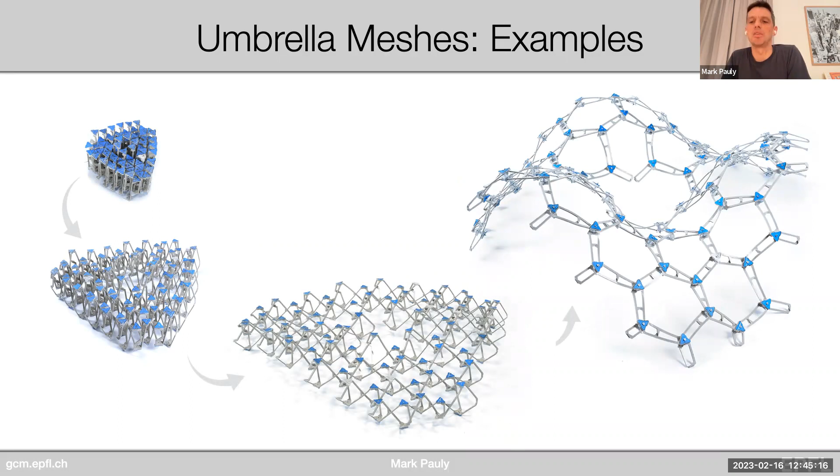So we can even 3D print something in a single piece, right, like this one here, and then deploy it to a structure. So there's quite a few benefits of doing this in a very compact state. We have this property of unlimited scale factors. So I didn't go into details here, but if you look at the auxetics, you can prove that at most you could approximate half a sphere. At that stage, you have exhausted the limit of curvature variation that you can have.

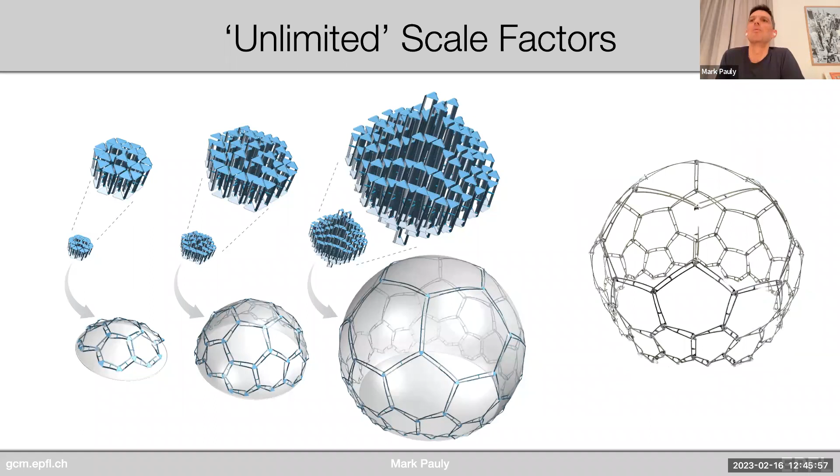But here we don't have these limits. We can actually make these height variations as big as we want, right? There's no limit in the stretch factor that we can achieve. And this is sort of a physical prototype we made of that spherical shape. It also gives us a lot more design freedom. I can approximate the same shape with many different umbrella meshes.

So there's lots of theory around conformal maps. A conformal map into the plane always exists. It's Riemann's uniformization theorem. But there's many different conformal maps that you can compute. So that gives us a lot of design freedom. Again, the optimization would not work without the conformal map, right? So this is not something you can just do easily. You need to understand the geometric structure of the problem.

So if I summarize these 4 projects that I've showed you, the input in this inverse design is the target state. We want to specify what our structure should deploy into. The output of the algorithm is the fabrication state.

That's what we can build physically, and we can build it in easy ways. So the first 3 examples are all planar. The 4th one is actually stress-free, which is very important. So you can build these cells and assemble them. There's no internal stress in the system.

What's important to make these simulations and optimizations predictive is accurate modeling of the physics, right? A lot of work goes into finding the right physical representations and models so that our prediction is actually accurate. Of course, we want to simulate these things as much as we can, but not more than necessary to get the right accuracy.

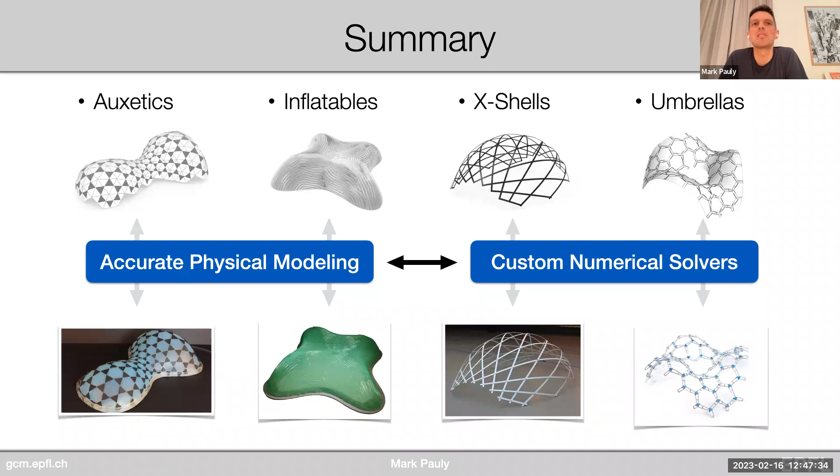We do build these solvers specifically for each problem. There's a lot of similarities that we can reuse, but I would really want to stress that the key thing to make this work is using the right geometric abstractions. That's sort of the main message: to study the geometry and to leverage all of these fundamental results that people have made. Sometimes that requires digging deeper into some of the math. So I didn't go into that too much. I showed you our friend Gauss, but there's of course more things that people have discovered in differential geometry that you can leverage.

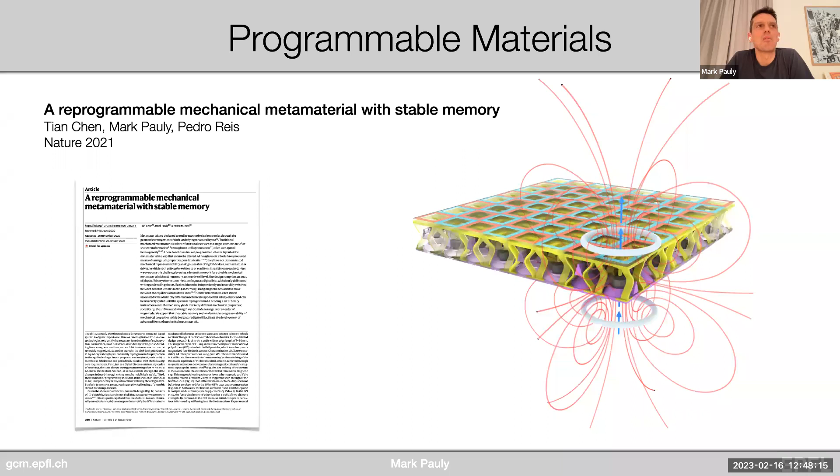And if you allow me a few more minutes, then I'll do a very brief outlook to where we want to take this next. For that, I'll show you very rapidly a project that we did with Tian Chen and Pedro Reis on programmable materials. So here we built a system that allows us to change the properties of a material by magnetic programming.

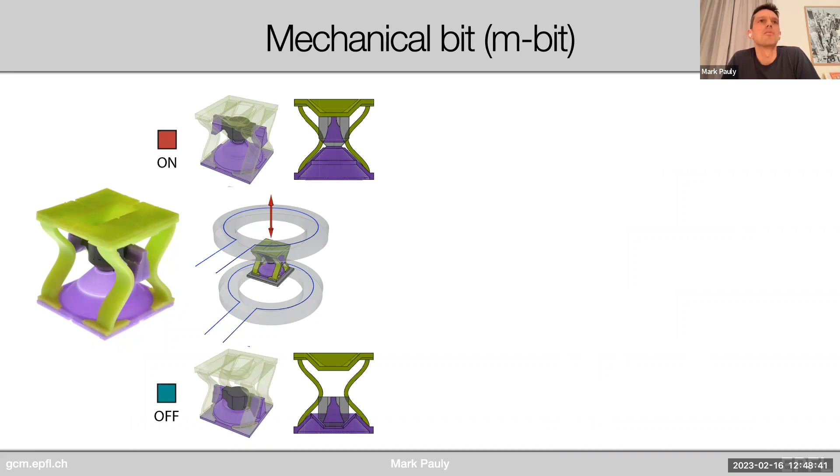So we have this unit cell that you see on the left, which is a bistable cell. Bistable here means that we have a shell, this purple part, that can be in 2 states that are both mechanically stable in themselves. So if I turn on the magnetic field, I can switch the cell from one state to the other. And the key point here, you see this sort of actuation as you switch the magnets. Okay, the magnet goes up or down, not very spectacular.

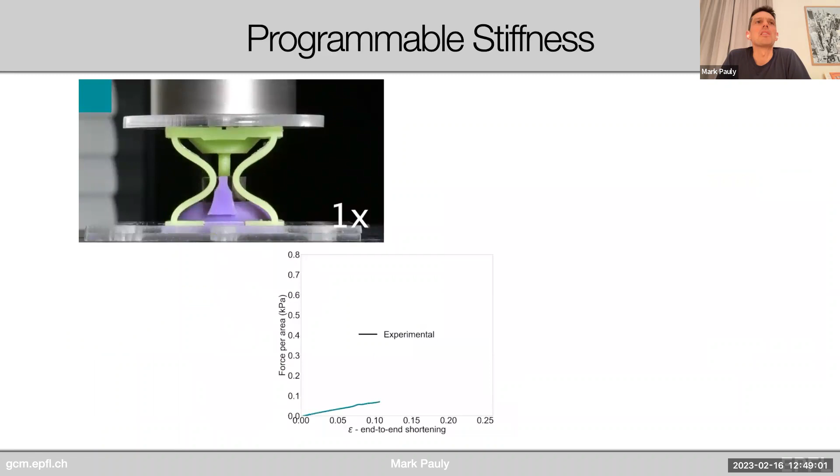But the main point and the way the cell is designed is that these 2 states have drastically different mechanical properties. So if the cell is in this state here, you see how, as I compress it, these green beams get into contact with the purple structure relatively late. If it's in the other state, they are in contact almost immediately, and that makes this system much more stiff. So now we have a unit cell that we can program to be in 2 different states and have 2 different mechanical behaviors.

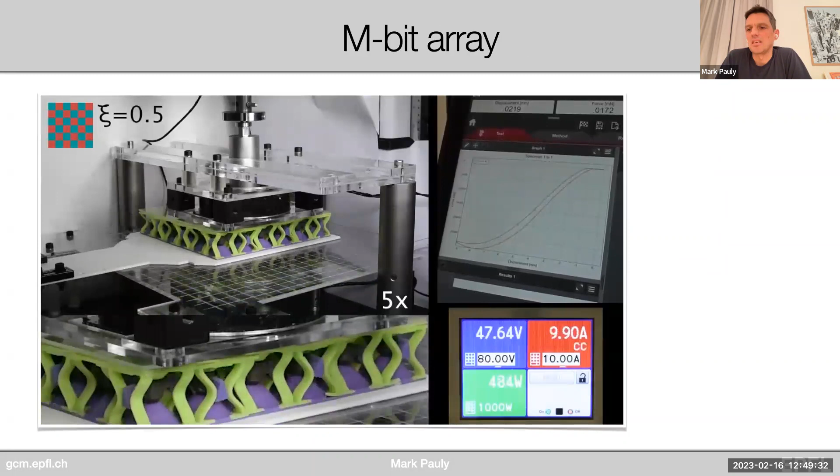You can assemble more of these cells into more complex materials. But the main point here is really that we now have a material that is not static, but that can be reconfigured in terms of its mechanical property. And this principle, I think, is very interesting in general, right?

So all of the structures that I've showed you before are, once they're fabricated, static. Static in the sense that they go to one target shape and that's what they're happy with. But if I want to deploy them into a different shape, well, I have to build a different structure, right? So they have a lot of benefits. They're very easy to fabricate because they are going from planar to 3D. The deployment is automatic. This is something that I think is fundamentally important.

So the target state is encoded into the material. And this is something I didn't spend too much time on, but they're also structurally performant. So for very low weight, you get very good structural performance. And as I showed you in some of these examples, we can get a very accurate representation of the target.

Again, there's many questions around this, what shapes are attainable and which shapes are not. Some of that you can answer by mathematical analysis. Some of that is unknown. But this question of, can we do multiple target shapes in the same structure? Can we maybe deploy with certain reactions to changes in the environment? Can we control the transfer of force as these structures deploy?

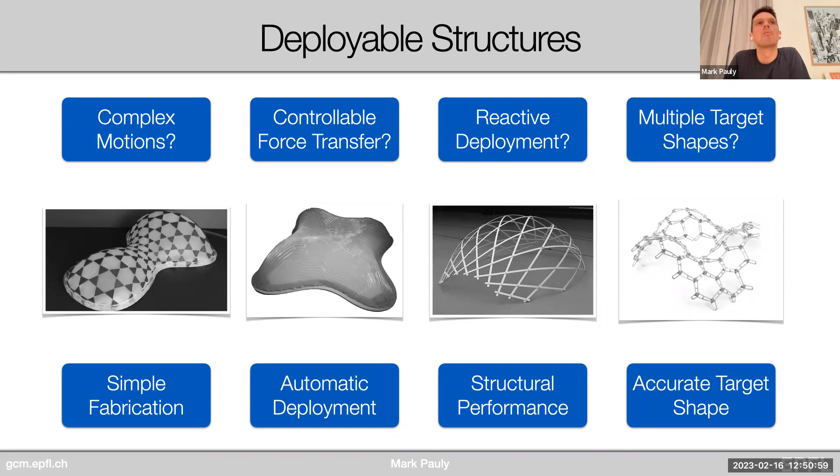This is of course moving towards almost like robotic or soft robotic applications. Can we get more intelligence into these systems? And I think the way to do this is to build more intelligent systems and bring some of that programmability into these structures. Now, I don't want to build fully actuated robots, right?

A big part of the intelligence lies in the geometric structure and the material itself. One fascinating question is how can we build in a minimum amount of programmability, something that requires very little in terms of control logic, but that gives us a lot more flexibility and allows us to build structures that maybe can be adaptable and react in certain ways. This is something we're looking into quite a bit right now, and I think it's a wide open space. I'm excited to see where this takes us.

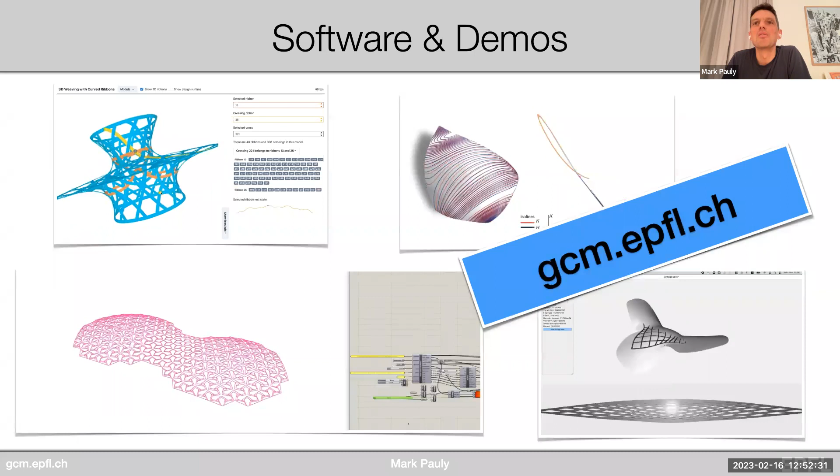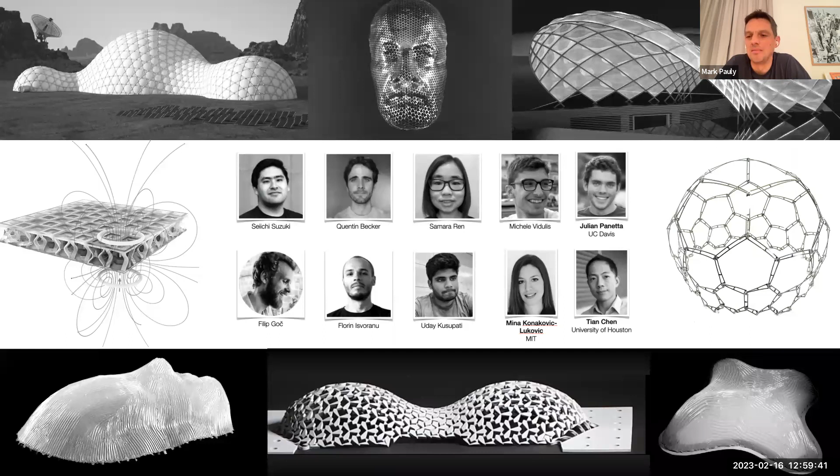We have a question in the chat: I wonder if the deployment process—basically the process from going from flat to the deformed state—is in any case considered during the optimization process. That is actually a very good question, and the answer is probably no, or at least not directly.

So for example, if you take the inflatables, if I just quickly go back to this—if you look at these videos, air comes in at a central point and it distributes around in some random way.

And we don't know, right? In fact, what could happen here, and we saw this in one of our examples, if it inflates in the wrong way, you might actually block some paths just by contact, and then you have to push it a little bit to actually go into this.

So here we don't take this temporal aspect of the deployment into account at all. For the grid shells, it's a little bit different because this is a much more coupled system. It's almost like you could pull it at one point and the forces will propagate very easily through the system. But again, we're not taking that specifically into account.

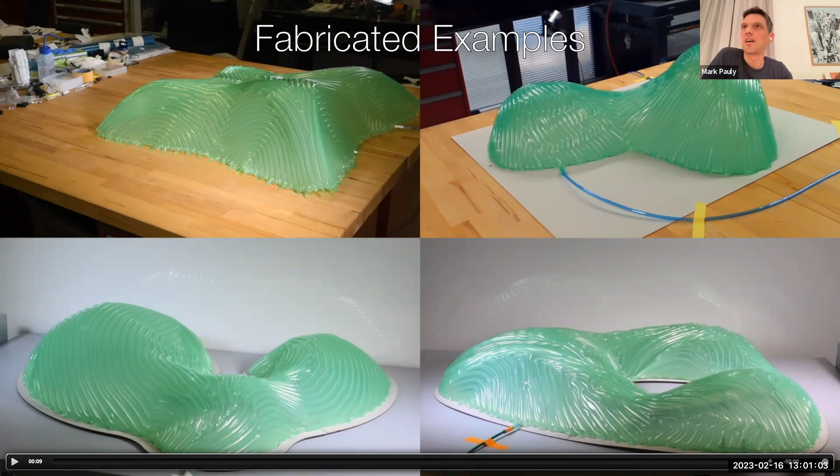What we're optimizing for is the elastic energy of the final structure and the initial structure. And what we observed just empirically is that energy sort of gradually increases for these grid shells.

But what we also discovered, and this is something we want to study more for the umbrellas and also for a new version of the grid shells that we did, is that these structures can be bistable. So you pull them open and normally they would just collapse back, but we get also multi-stable states where they actually settle into a different local minimum and don't go back to the original state. It's not something we can control at this point.

One very interesting and fundamental question in general for these transformable systems is, what is the optimal deployment path? How do you actuate the system in an optimal way? And for example, what kind of energy barriers do you have to cross if you have multi-stable systems? Because right now we don't know, and sometimes we observe this, but we don't understand why they're there, when they're there. We cannot predict this. So in that sense, I think there's a lot of interesting work to be done to take that deployment process actually really into account in these systems.

One more question here. Since part of these structures seem to deform at very different rates, do you have to consider inertial effects, or is it most often just a quasi-static analysis to characterize the deployment?

Yeah, all our simulations use a sort of quasi-static assumption. So we solve for these equilibrium states and we do not take into account the dynamics, which is actually also something that I think is very interesting.